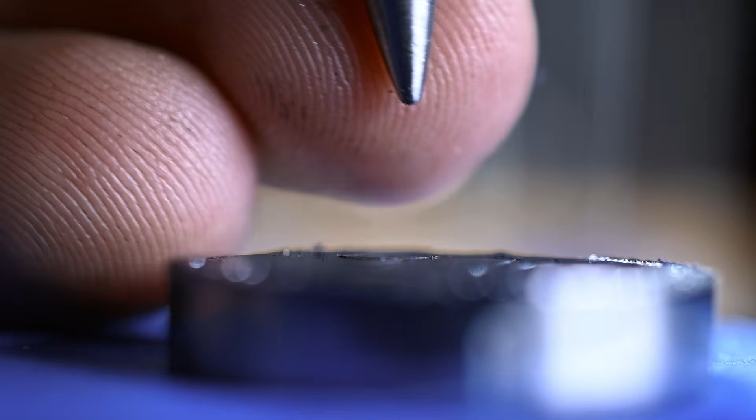Every good engraver's kit starts with a good hammer, and I started with this hammer. Let me tell you, friends, this was not a good hammer to start with. It was my grandfather's, the tradition of which is always nice, but if you ask me, it needs to lighten up a bit. So rather than spending $20 on a new hammer, I set out to spend 20 times that amount to save money making one.

It all started with this maple tree that spontaneously died on me last spring. Not one to leave my botanical failures standing around, I decided this was the perfect tree from which to craft a mighty hammer. So I cut it down, trimmed the excess, and turned my metal lathe into a wood lathe for the afternoon.

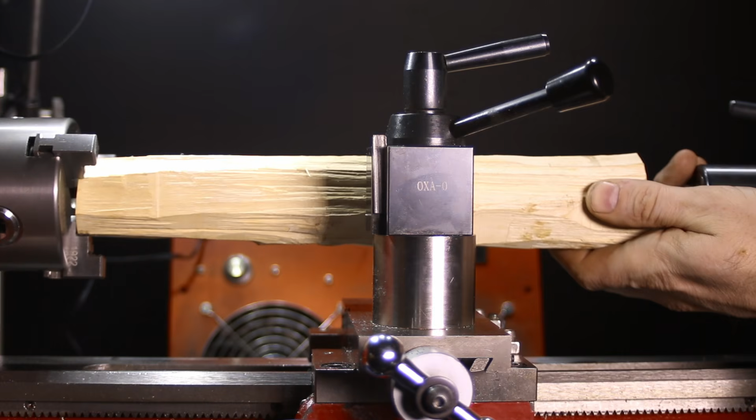Originally, I had planned to make the hammerhead from some mild steel, but considering that I accidentally became a woodworker that fateful afternoon,

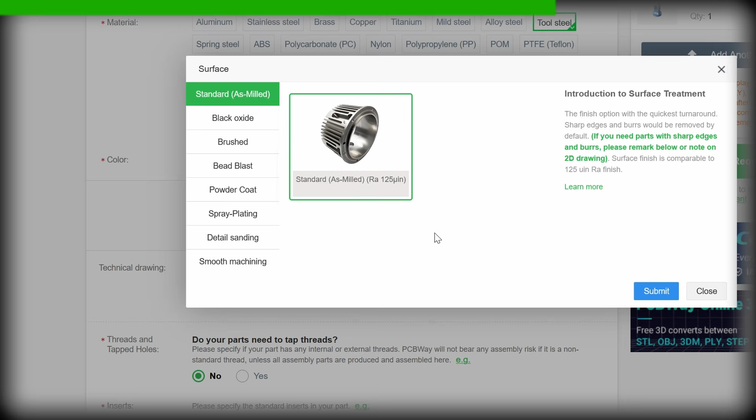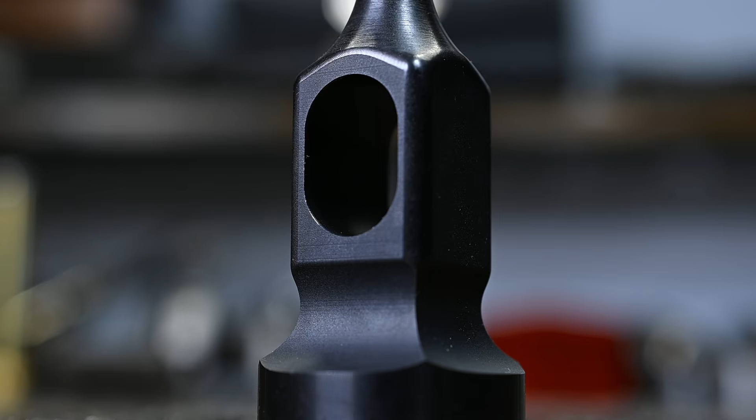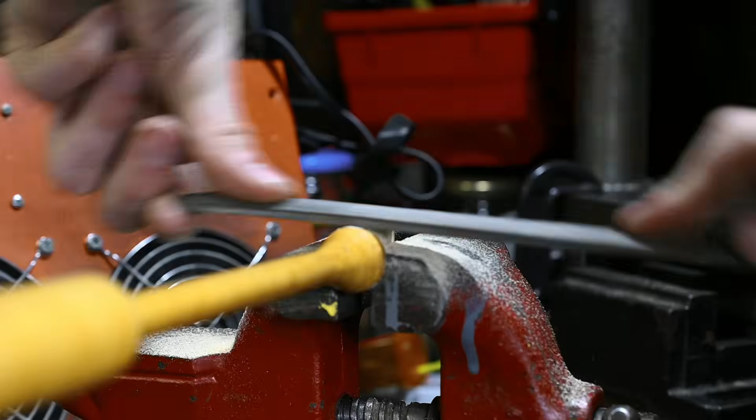Easy as that, and I have my new hammerhead, with a quick polish of the faces, and an even quicker shaping of the handle's wedge. I can jam this handle straight into the eye of this head, and presto, the hammer I've always dreamed of. Well, the dream didn't include these cracks, but surely that won't matter in the long term.

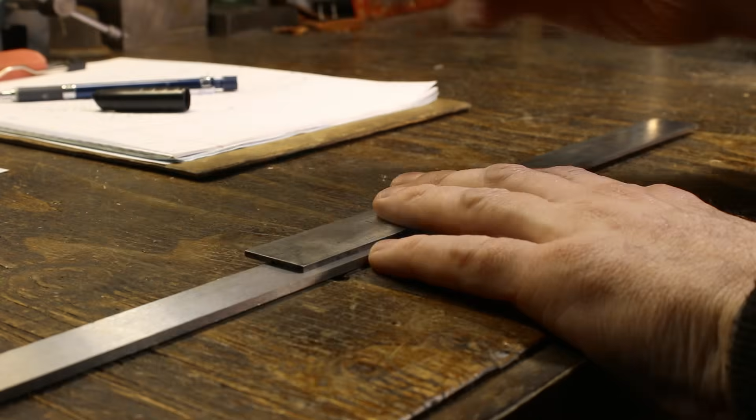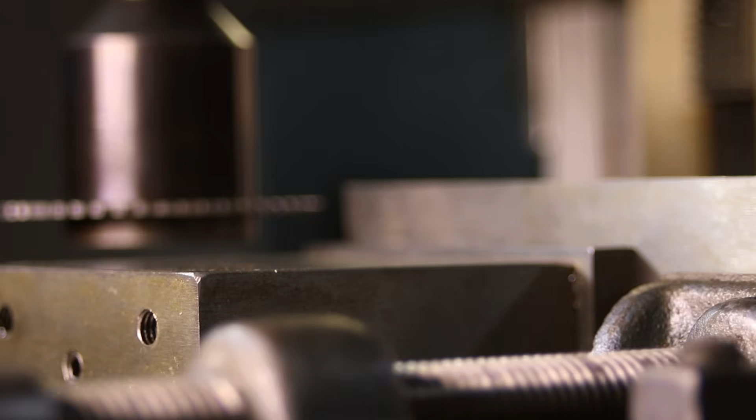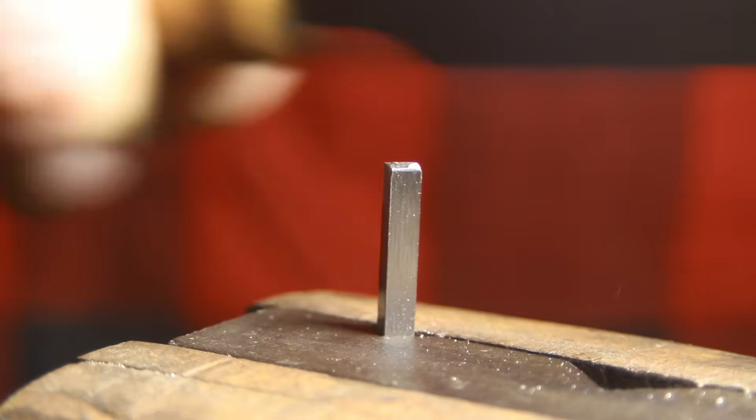When all one has is a hammer, every problem looks like a nail. So the ancients foretold. But I only have screws, so I need to make that nail. I started my graver journey by cutting apart some tool steel sheet that I had on hand. If you're making your own gravers, I would not recommend starting with sheets of metal, but with a bit of persuasion, I wrangled this sheet into something approaching 1/8 of an inch square. The advantage of starting with annealed tool steel, compared to something like high-speed steel blanks, is the relative ease of initially shaping it, since it's soft enough to file into submission.

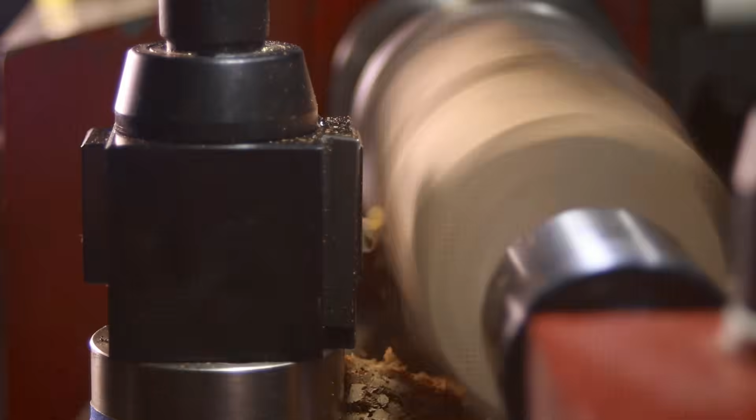I devised an elaborate system of a handle, made from some black walnut my cousin gave me, and custom ferrules. The ferrules slide on and off, my attempt at some sort of quick-change tooling system. The handle stays the same. The ferrules hold different tools, and I swap between them at my leisure.

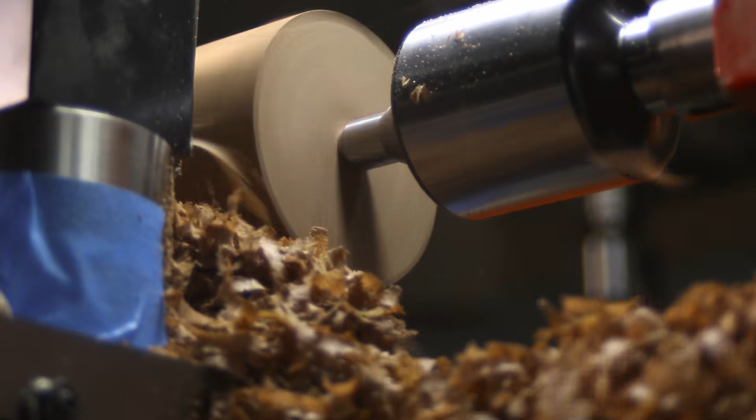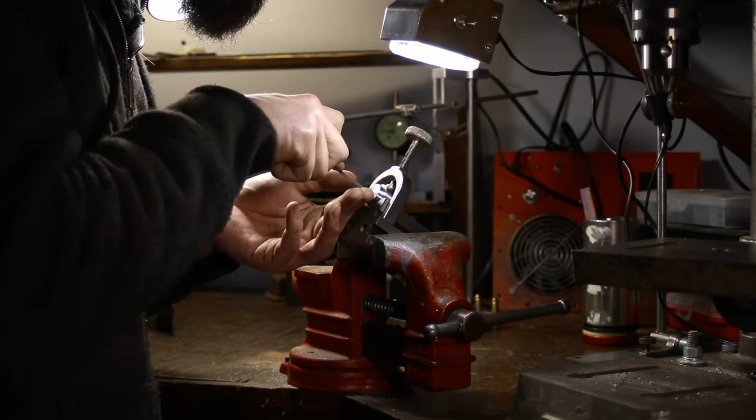The results weren't terrible, for my skill set anyway, and yet I still found the handle wanting. I can't really put my finger on why. It functioned fine, albeit it would function better with a clearance flat filed off one side of it for those low-down angles, if you know what I mean. But something was missing. Perhaps it was my forlorn machinist soul speaking from under a mountain of sawdust. Perhaps it was just indigestion. Or perhaps it was the looming prospect of needing to make at least 3 more of these stainless steel ferrules. In the end, I gave in to the indigestion and grabbed some of this round O1 tool steel I had slated for a different project.

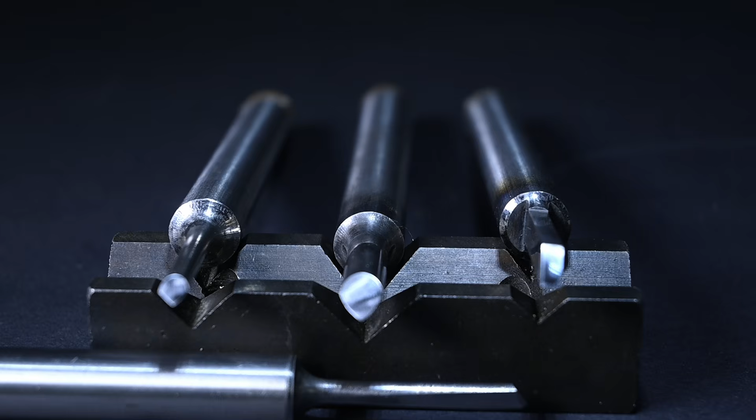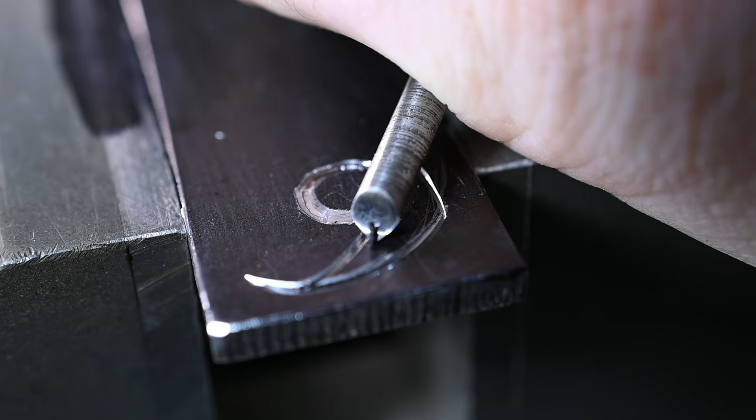Oh, the gravers I made with this steel. The simple yet rugged design fostering my coping skills as I searched for the perfect Goldilocks-esque graver geometry that was just right for me. V-point gravers. One small, one large. Useful for shading, though I'd have skipped the smaller if I hadn't made it first. It's too small for anything but the finest of details, and my current skill level is too big to tackle something so small.

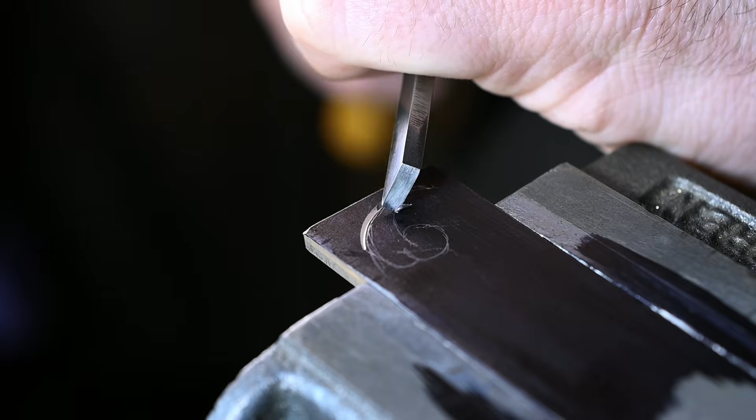A flat graver. Good for hogging out background material or making very wide cuts with a twist of the wrist while hammering. This one is perhaps a bit too large, but I already had a small one I made for the ferrule system, and I've found use cases for both already.

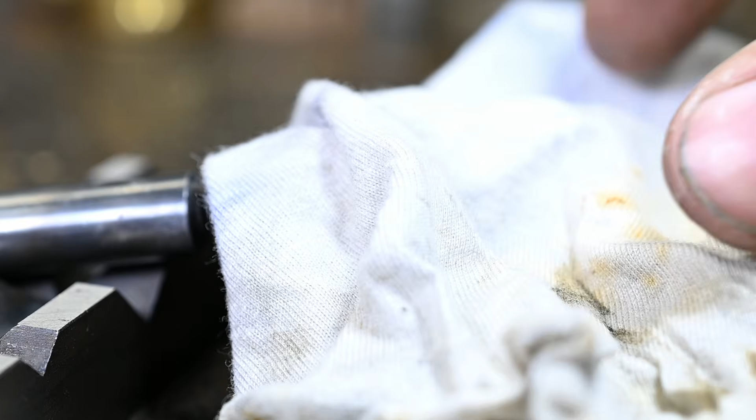But if I had only one graver to take to my grave, it would be the next. Gaze upon its gloriously curved sides, that plump 120-degree angle, that delightfully shiny face. Well, just ignore this little bump here. I accidentally smacked this puppy into the edge of the glass quenching container while it was red hot.

Speaking of, if you're unfamiliar with the basics of heat treating, you're far better off finding some other YouTuber to learn from. But I suppose, since you're here already, I should give a quick synopsis, as if I hadn't just learned this 2 weeks ago myself.

The process goes as such. Step 1. Heat. The typical advice is to heat the steel to a cherry red color. Having some disagreements with the merits of color myself, I usually just heat it until it stops changing colors. If you want to measure more empiric than color, though, you can use a magnet. Through a magical process known as science, steel loses its magnetism somewhere around the temperature at which you want to quench it. Which brings us to Step 2.

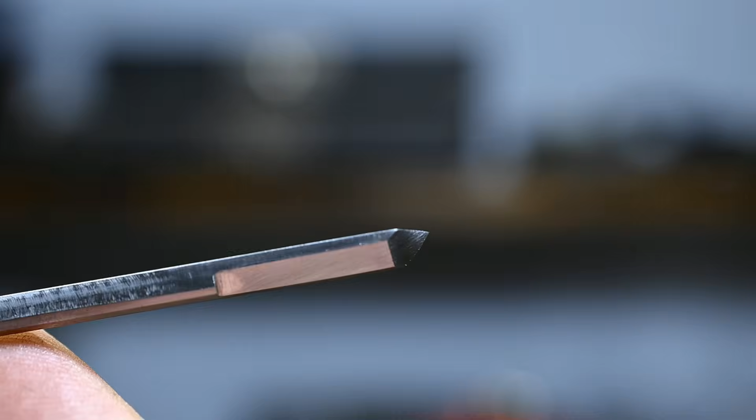Quench. This is O1 tool steel. The O stands for oil. So find the nearest deposit of oil and throw this hot poker straight into it. Step 3. Polish. Seriously, this step is actually important for reasons we will get into in Step 4. Tempering. The whole reason we have a Step 3 is to prepare for Step 4, which is this step, which is tempering, which is the step that partially undoes the combined efforts of Steps 1 and 2.

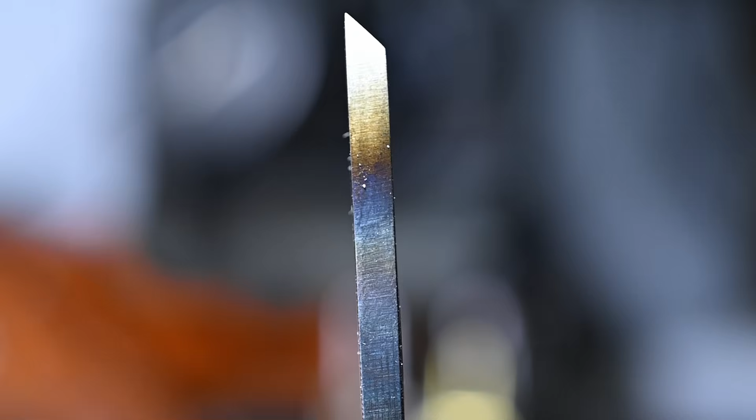For a tool like this, which happens to be the only type of tool I've ever heat treated, a process known as drawing the temper works best. Apply heat to the pointy stick, not at the tip like before, but somewhere down away from it. As the steel heats up, it will change colors, from this point, growing out towards the ends of the tool. The very edge of this color change is what matters. I hear it's something of a straw color, but I don't really know what that means. So just watch the edge of it.

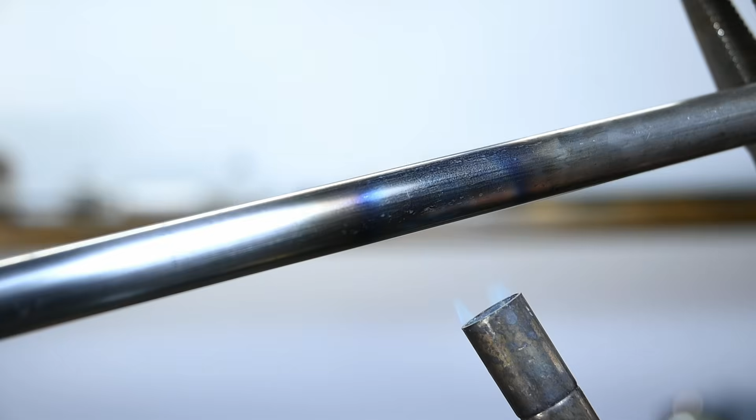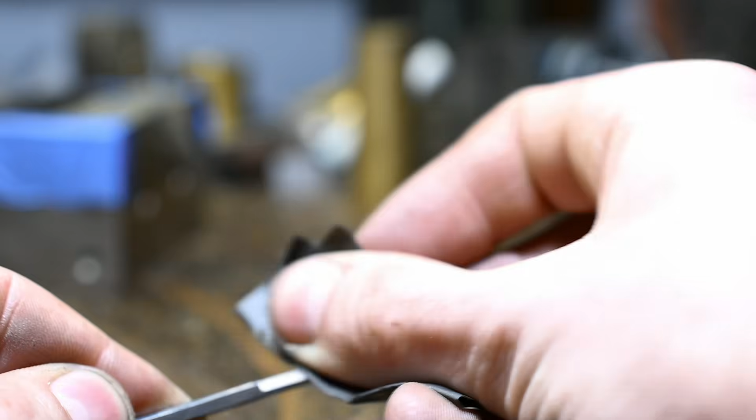When it reaches the tip, immediately stuff that hot pointer into the nearest water reservoir. Water this time, not oil as before. It needs to stop heating as quickly as possible, and water is much better at doing so than oil. The astute amongst you will have figured this out by now, but being able to clearly see the color change is why Step 3, polishing, is so important. Remember to keep your tip clean and shiny, for whatever marks the end of these tools will inevitably mark the ends of your patience as these imperfections manifest in your engravings.

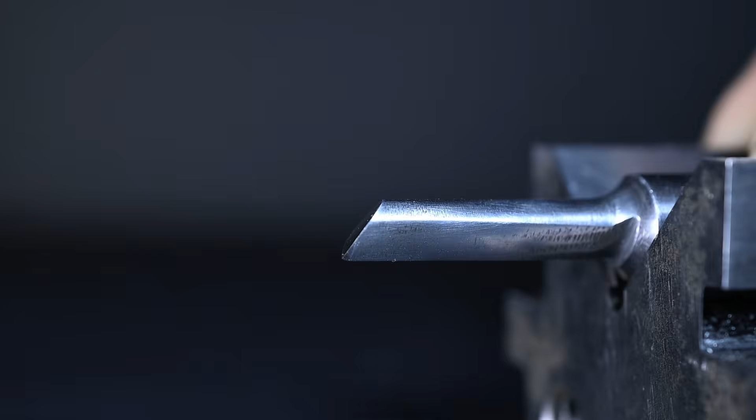Continuing the theme of pretending to be an expert in matters I just started learning myself, let's get into graver geometry. The cutting faces of all these gravers are angled back to something around 45 degrees. I haven't explicitly tried any other angles here, but the exact angle isn't critical anyway. And as such, in a surprising narrative twist, none of these gravers are actually 45 degrees after all.

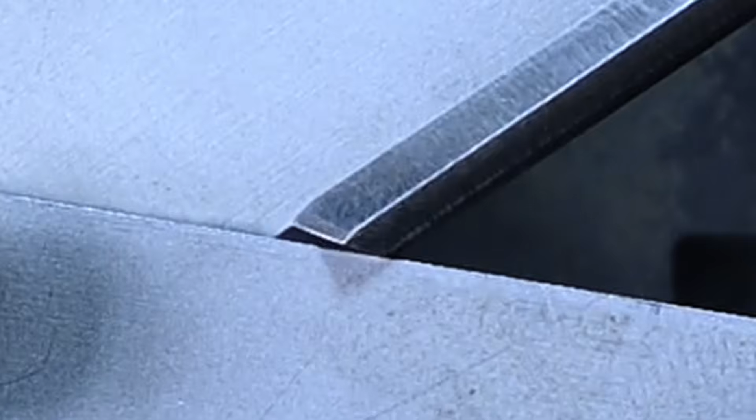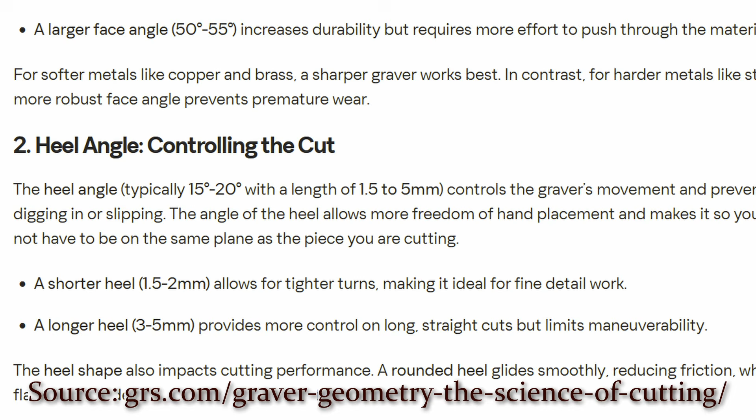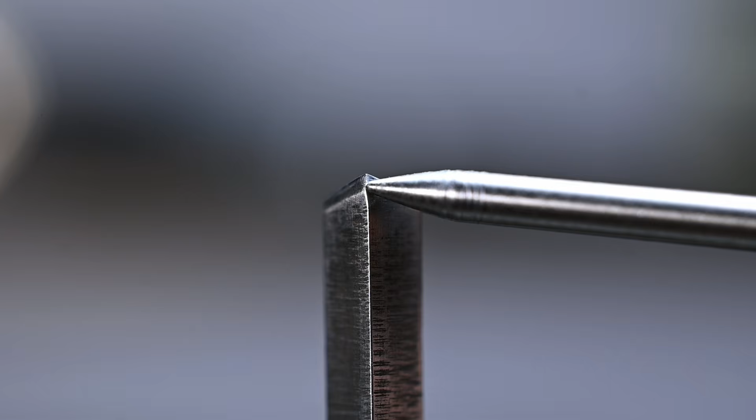These angles on the sides of the cutting face form what's known in the engraving world as the heel of the graver. Being something of a foot enthusiast myself, I can attest to the importance of the heel. I aimed for a seemingly standard 15 degrees on these, but again, the exact values are not critical. What is critical is that the combined geometry of these two faces comprising the heel be centered. I made the mistake of accidentally grinding one side further than the other on one of my early attempts, and the results were extremely frustrating.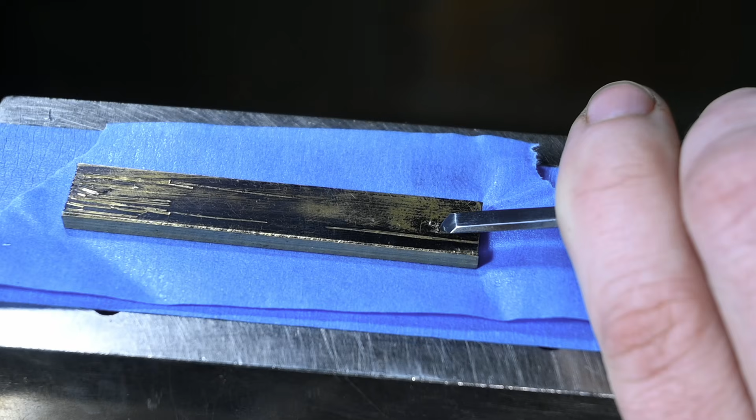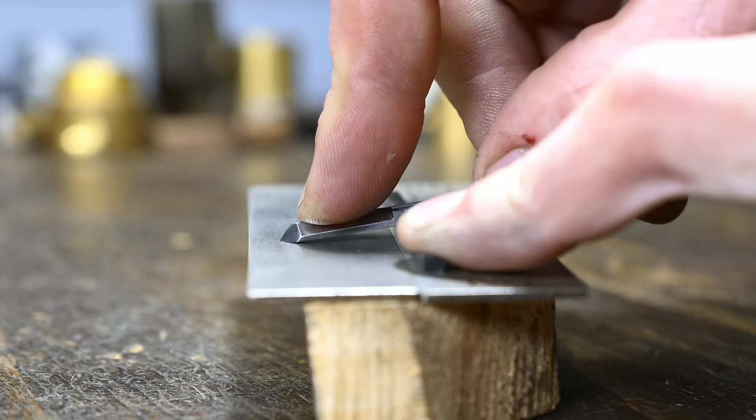The second critical aspect of the heel is its length. Too short, and your graver will want to dig into the material. Too long, and you will be fighting to keep the tool engaged with the work. Multiple resources I found mentioned something in the range of 0.5 millimeter for the heel grind on each side. In practice, I found that initially grinding the heel shorter than desired, then walking it out to length in between some test cuts, was the method I preferred over trying to hit any specific length measurement.

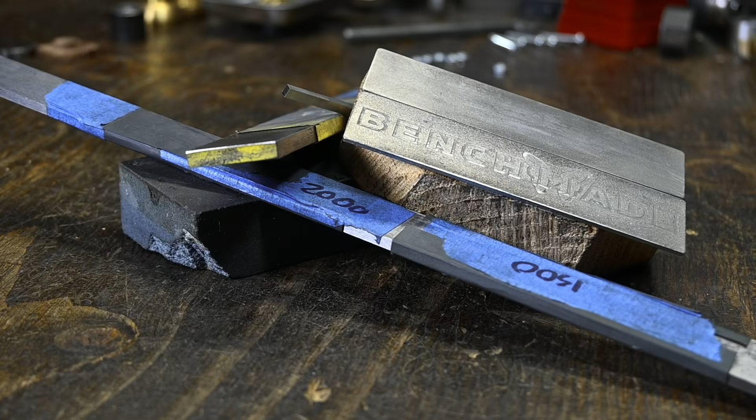This iterative method ensured I didn't overshoot the heel length, which is far worse than the alternative, since the only way to correct an overshoot is by grinding the entire face of the graver back. A tall order when you're shaping these things with bench stones and an old knife sharpening kit. Sam Alfano, an infinitely more experienced engraver than I, showed a trick for setting the heel in one of his videos that I will link to below.

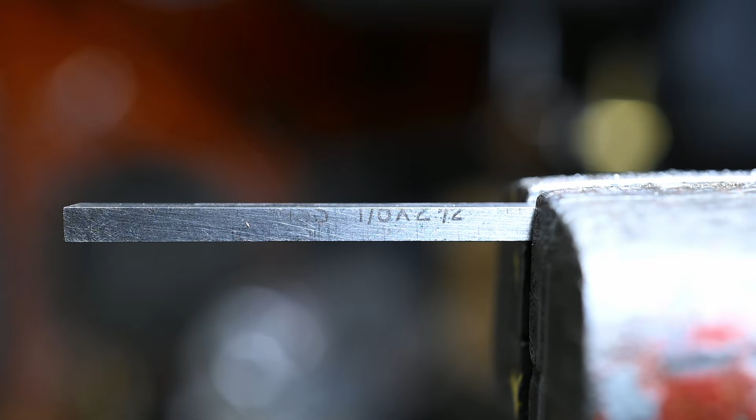The basic idea is to get a piece of steel, ideally hardened so it lasts a while, about 1/8 of an inch thick, set on top of a stone. Rest the side of the graver on it, and sweep back and forth a few times. The height of the steel block sets the angle to roughly 15 degrees without much effort.

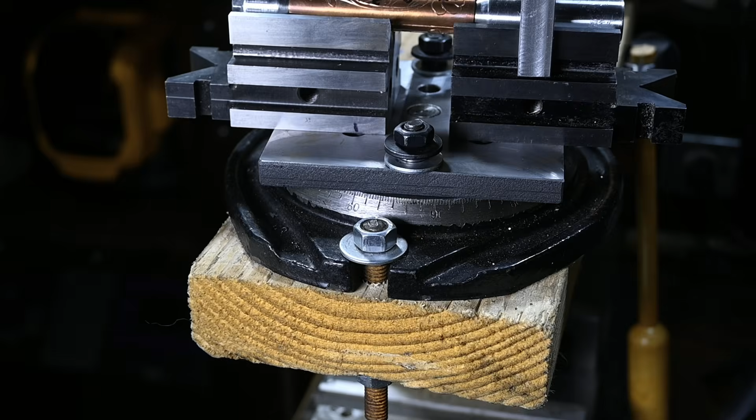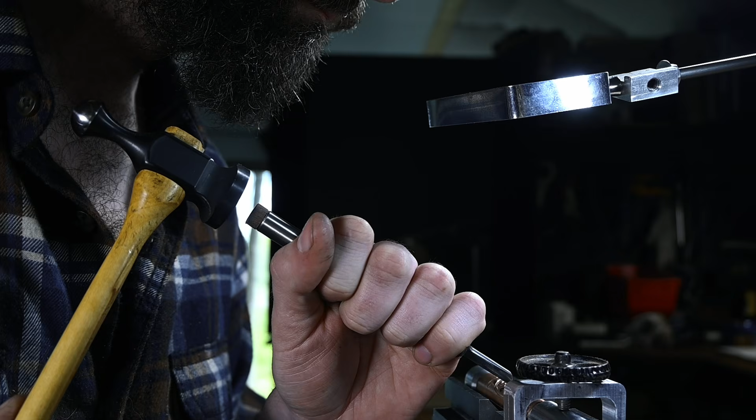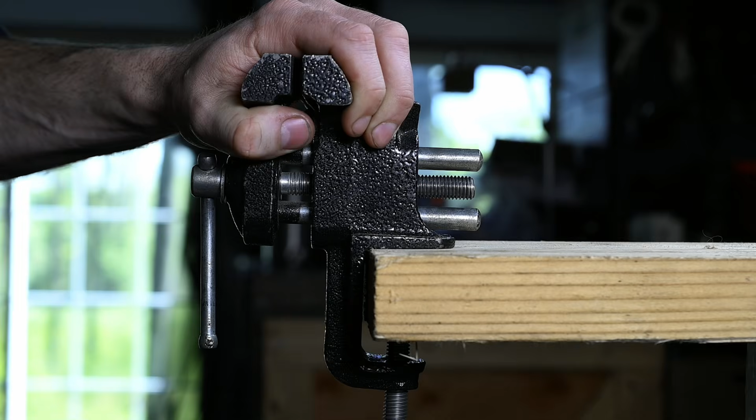Second in unexpected importance to the hammer, in my experience anyway, is the necessity of smart work holding. Whether you engrave standing or sitting, you will want some way to move the work to a comfortable height for both your arms and your eyes. The good news is that the forces necessary aren't very high, so good, wholesome, cheap, and easily adjustable wood works just fine as a base for us beginners. My first setup, worth mentioning, was a clamp-on vise, clamped to the end of a 2x6, screwed to the top of a scrap piece of 4x4.

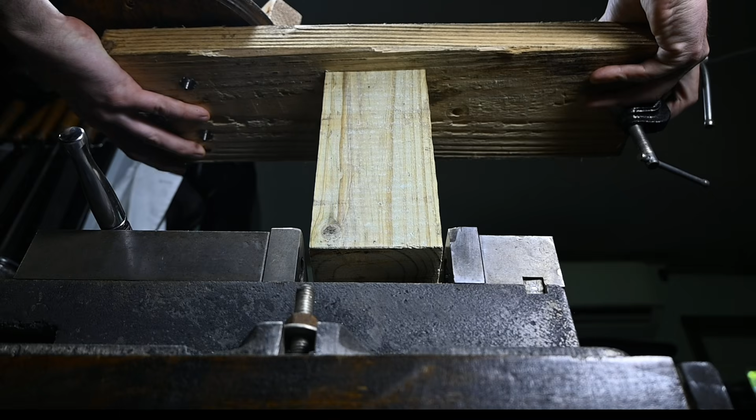All held upright by this monstrosity of a machinist's vise. I'm sure if you're following along at home, you will have no trouble sourcing all of these materials. This setup works alright if you can unimpededly walk around the work while engraving.

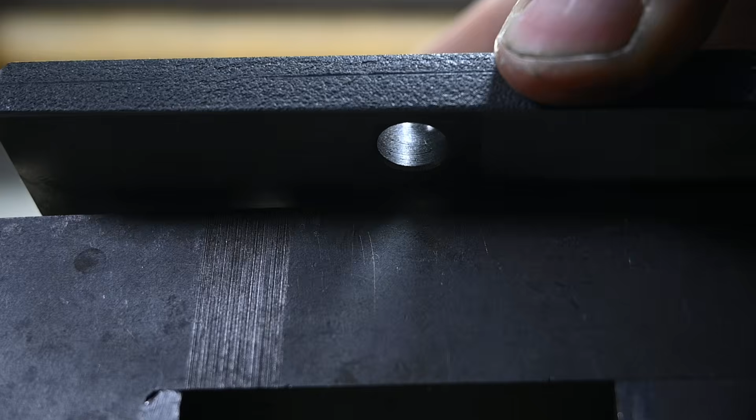Ultimately, though, I found that some sort of swiveling work-holding apparatus was worth the effort. For me, this was simple, as I had a swivel base for my mill's vise sitting unused in a box. I made up a small fixture plate with a precisely bored hole in the middle for the swivel action, and mounted my bench vise to the top for the actual work-holding.

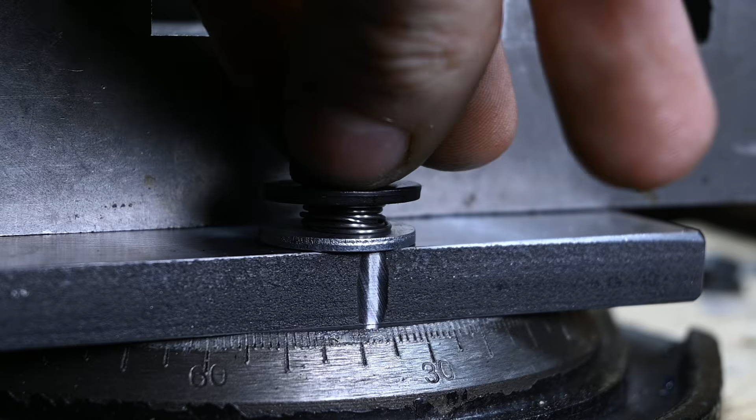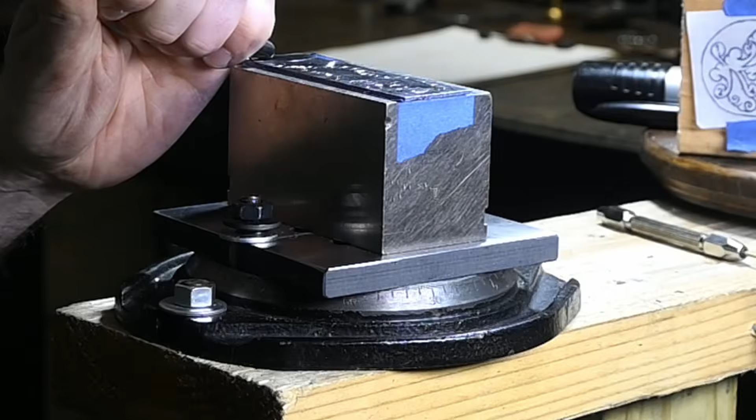This setup works well, with the notable exception of when I am engraving on the far end of some large plate. In this precise use case, I have to lock down these retaining bolts because the increased leverage on the ends of wide parts transfers into some slight undesirable rotation in the base while hammering. This vise in particular turned out to be a mistake, which I will explain in a moment.

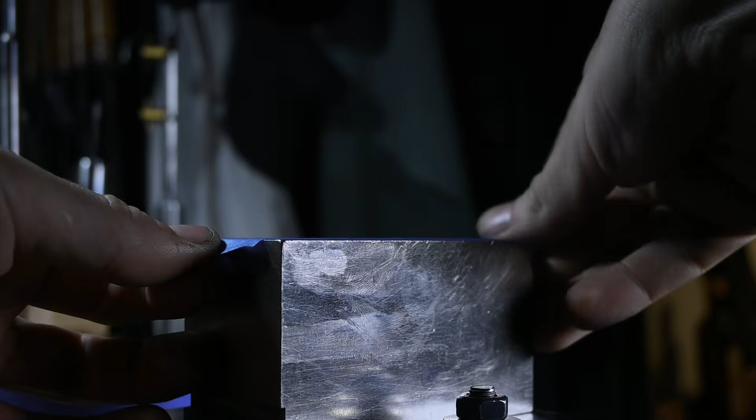Holding small, thin sheets in a regular bench vise has always been a nuisance, so I quickly pulled out some PCB manufacturing knowledge I had bouncing around in the old noodle. By laying down some masking tape onto a block, and again onto the bottom of the part, and applying some superglue in between, unimpeded access to the entire work surface becomes trivial. The tape allows for quick and simple removal of the part as opposed to just gluing it down directly.

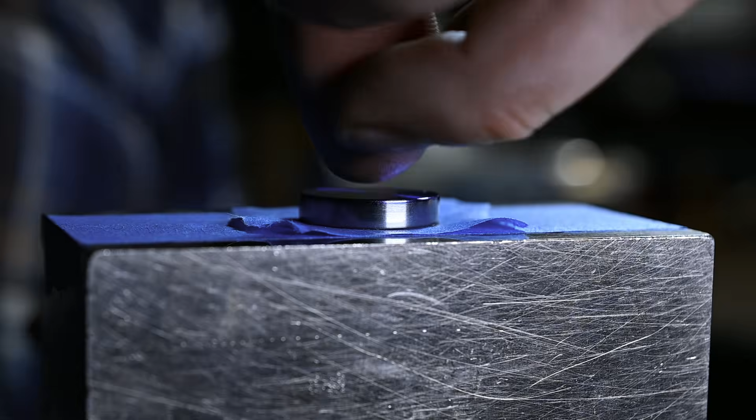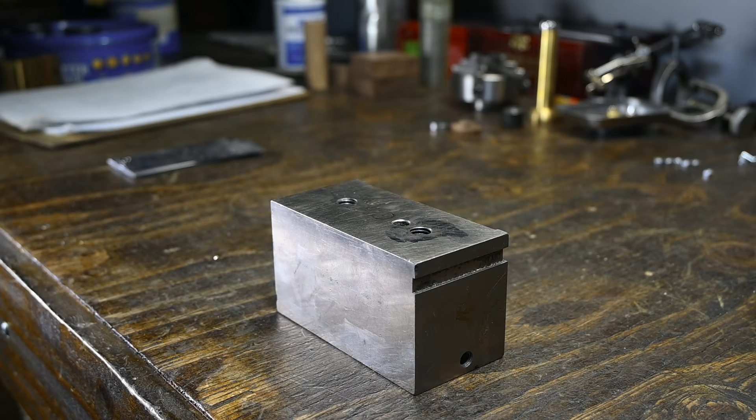Since I was just gluing parts to blocks of various material anyway, the vise quickly lost purpose. In fact, it became a nuisance. The handle sticking out the back often got in the way of my graver holding hand, forcing me to reposition. So I ditched the vise, and instead screwed a block of cast iron to the top of the fixture plate directly. The result was an immediate notable improvement in the quality of my engraving.

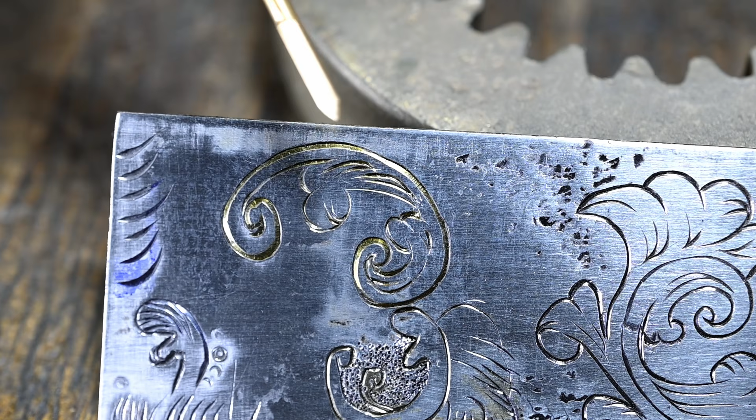You can clearly see it here. The first engraving was engraved with the vise in place, the second without. The lines in the second are much more consistent. You can actually point out the places in the first where the vise's handle got in the way mid-cut.

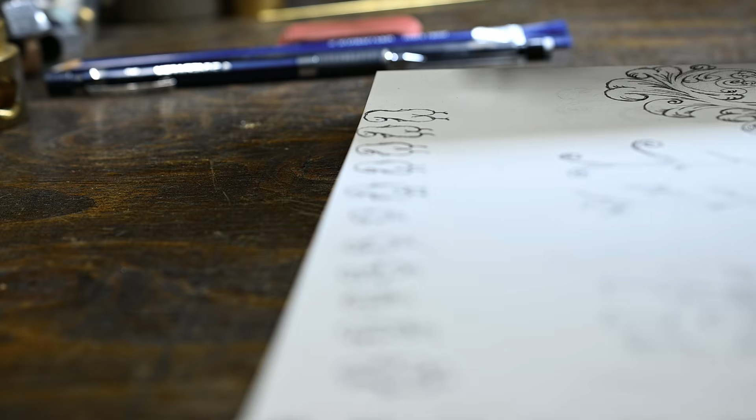In my brief foray into engraving, the skill I've found to pay the best dividends doesn't actually involve engraving at all. It's in drawing. Even if you never intend to design your own scrollwork, the experience of drawing circles, curves, and shading is all directly transferable to engraving. Learning how to move the hand in conjunction with the eye to form an S-curve, for example, is roughly the same whether it is being drawn or engraved.

I prefer to practice by attempting some sort of completed scrollwork, but really you would be much better off just drawing out some basic shapes repeatedly until you feel you have a good grasp of how to form them. The effort expended in sketching out a complete design on paper can directly transfer over to metal as well. I grabbed a few sheets of this tattoo transfer paper on eBay for fairly cheap to address the task.

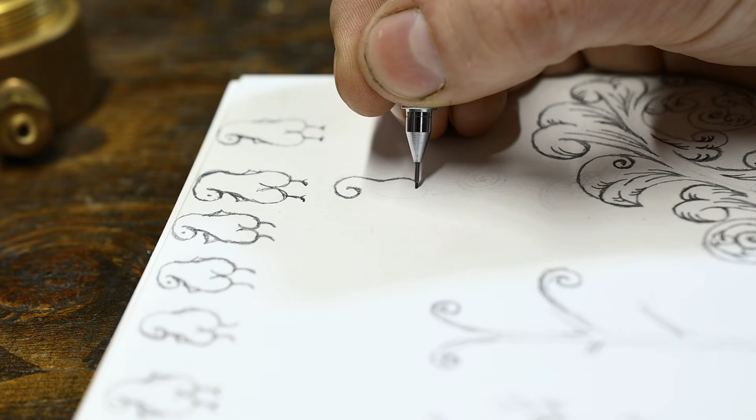The process goes as such. First, sketch your design out on paper. Then, using this waxy tattoo transfer paper, trace over the design. Typically, I just trace the major features here, the spine and major leaves only, since this step gets a bit tedious. Then retrace this design with this fancy ink sheet underneath. The instructions mention using a ballpoint pen for this, but I found that placing the paper on top of something hard and using a pencil works best for me.

Finally, deodorant, you filthy pig. I'm just pulling your leg. Well, your armpit hair at the very least.

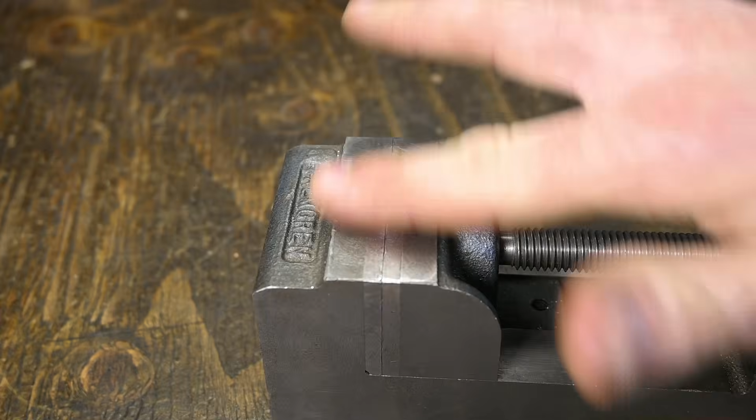Just lather your workpiece up, relishing the smell of cleanliness and chemicals, then slap your waxy design on top. With a thin skin of deodorant and a bit of pressure on the paper, the lines come out clean and clear. Once it dries, the ink is very resilient. And with that, the last piece of the puzzle falls into place, and I can finally complete the masterpiece I set out to construct some 59 long years ago.

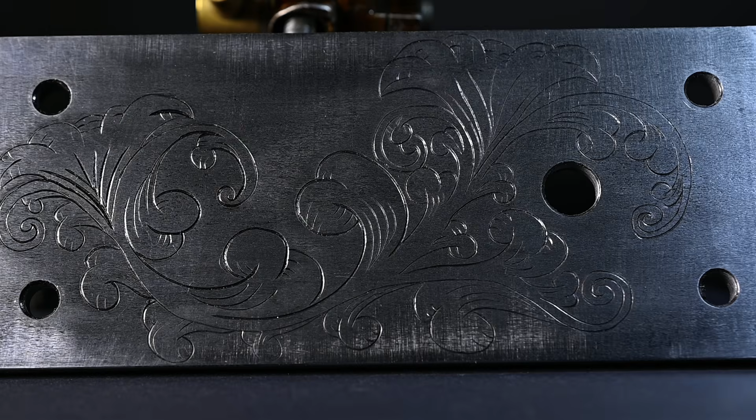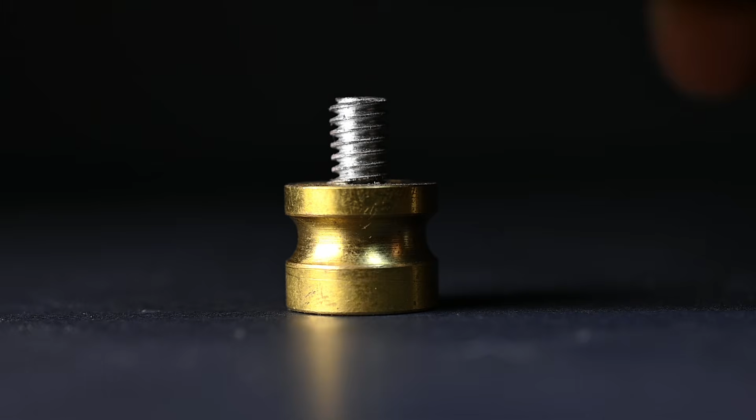Well, I hope you enjoyed. This video is a bit different than my usual format. I felt inclined to go into a bit more detail than usual, as I found the information out there on engraving relatively sparse, often locked behind paywalls or just fragmented and difficult to locate. Most of the information I found covered pneumatic handpiece engraving, for which the basics seem the same, but the one-handed nature of it is fundamentally different than the two-handed nature of the hammer and chisel. Well, that's my understanding of it anyway, as someone who has never even seen a pneumatic handpiece.